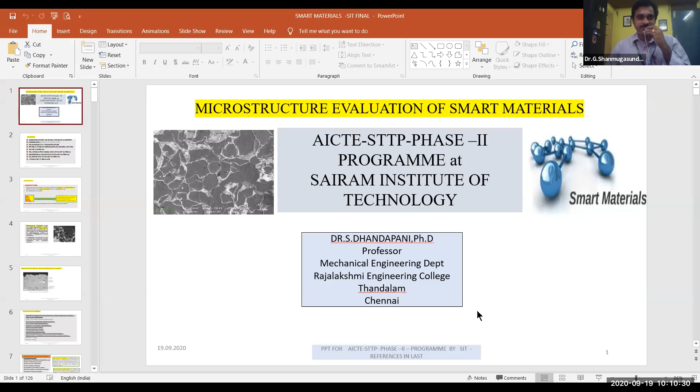Thank you very much to the Sairam College group for inviting me, and to the Department HOD and faculties for the introduction note. Thank you, and good morning to one and all participants present. In this session we are going to see the microstructure evaluation of smart materials.

In this microstructure topic, the content includes phase change, crystal and defects, microstructure, microscope imaging and resolution, measurement of microstructure, general types of microscopes like optical microscope, XRD, SEM, AFM, TEM analysis, and smart materials and transformation mechanism of smart materials, properties and components of smart materials, classification of smart materials, and applications in real life. So these are the contents we are likely to see.

As a basic overall brief of this session, we'll recall the fundamentals already studied in material science, metallurgy, and physics—the basic elements of microstructure like crystal, lattice structure, and unit cell, which are the basic parameters.

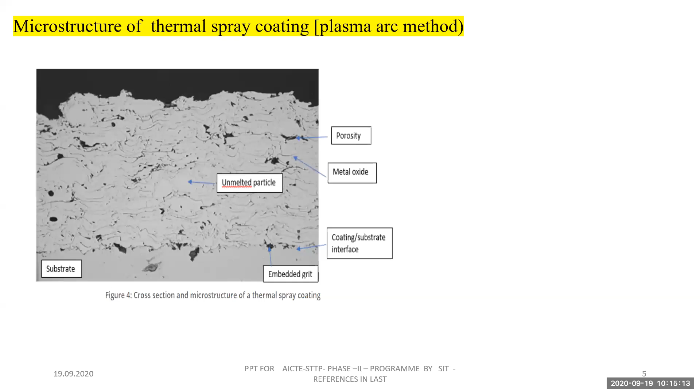That is called microstructure evaluation. A sample microscope diagram is shown, which is a thermal spray coating by plasma arc method. See the cross section and microstructure of the thermal spray coating. After coating, some porosity, metal oxide, and unmelted particles are noted. So like this, only microstructure will be available.

So various methods for measuring microstructure analysis - SEM, EDAX, XRD - you might have heard for research and project purposes. Apart from this, laboratories, consultancy or research laboratories, have these types of methods: Fourier transformation infrared analysis, white light interferometry, rheology and viscosity measurement, high temperature testing, thermomechanical testing, zeta potential measurements, metallography, hardness testing, physical testing - these are examples of analytical techniques.

But we are not going to see all of these, only one or two samples. And what are all the things that are to be measured?

Using these techniques, we can measure grain size of the microstructure, identification of inclusions like tiny parts, porosity and bonding evaluation - how strong the bond is, refractory attack mechanisms and heat impact, surface deposits and coatings, development of interfaces or reactions, unknown particles or materials identification, evaluation of material processing, performance evaluation and variability, failure mechanisms and crack developments. These are the examples.

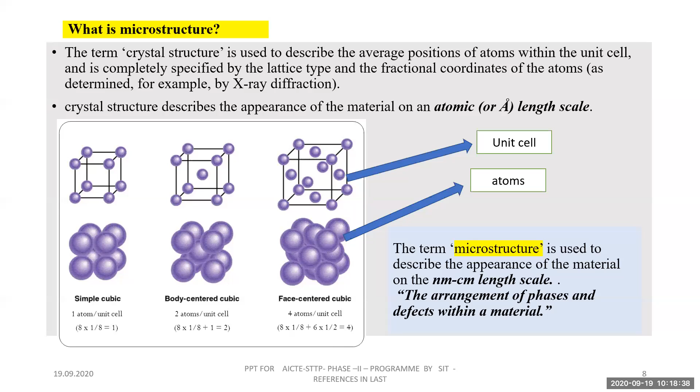Before that, crystallography is related to microstructure. Crystallography is the study of crystals, the formation of solids through X-ray determination, and crystal habits - that is, formation of crystal shape and crystal defects. If we study this, it is called crystallography.

Crystallography with respect to material applied on metals is called metallography. So all are integrated terms.

Crystalline materials are those where atoms or molecules are arranged in a regular or orderly manner in a 3D pattern - we can call that crystalline material. If it is amorphous, that is non-crystalline.

So in crystallography, what are the terms? The crystal - what is crystal? Crystal means a solid whose constituents, atoms or molecules, are arranged in a systematic geometric pattern.

The structure implies the arrangement and disposition of atoms within the crystals. So within the crystal, the arrangement is called structure. And atoms arrange themselves in a distinct pattern in space, which is called space lattice.

This is related to the unit cell, which is the smallest group of atoms possessing the symmetry of the crystal. So a number of unit cells will form the structure, and overall these will form the crystal. The layer of atoms or planes along which atoms are arranged is known as atomic or crystallographic planes. These things we know, we are just recalling.

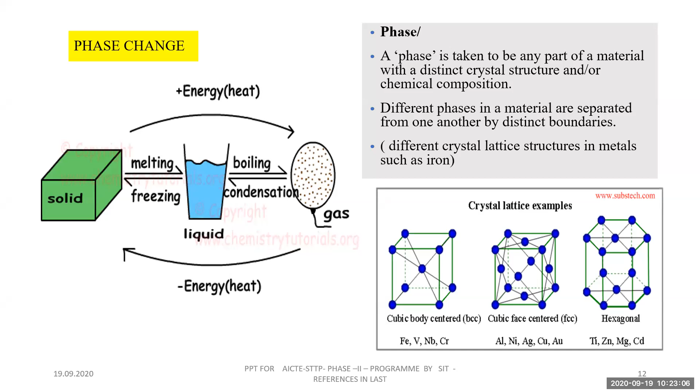And defects, as already told, are also one of the parameters for the formation of a microstructure. A defect means any disturbance to the perfect periodicity of crystal structures. As explained in the previous slide, with the addition of heat or energy change, the phase changes. Due to this, there is a possibility of defects. Lots of defects are there; a few are examples.

Zero-dimensional point defects, linear defects, 2D and 3D defects. Vacancies and interstitials are point defects; linear defects are groups of irregular positions, that is screw and edge dislocations. Planar defects are interfaces between homogeneous regions of the materials, like grain boundaries and external surfaces, and then volume defects, and finally cracks will form. This forms a new structure, and thereby the property will change.

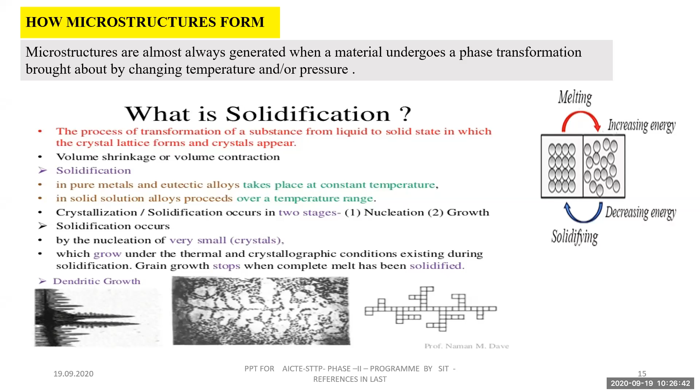See this left side: the melting, increasing energy, how the atoms disappear, and after decreasing energy and solidification, it is automatically reoriented. So this addition and liberation of the energy changes the crystal points, the crystal. So this is actual solidification. See this.

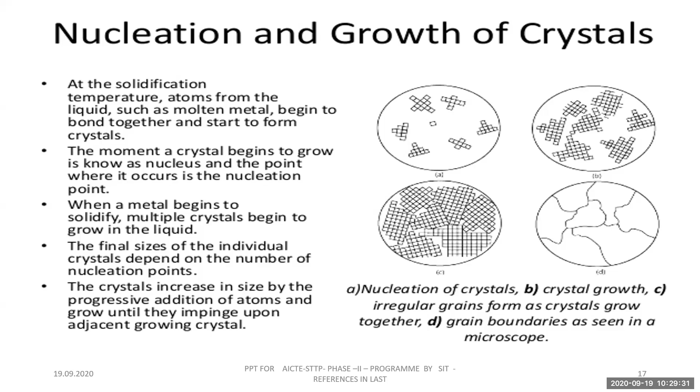So the nucleation of crystals, then crystal growth, then irregular grains as crystals grow, and finally grain boundaries are seen. So this is the mechanism of how the grain boundaries form by liberation of temperature from liquid to solid. So, examples of phase separation. These are the materials.

See, martensite and austenite are the main reason for smart materials. Changing the temperature will change martensite to austenite and austenite to martensite, and this change impacts the smart materials more. Martensite is very hard and brittle. Austenite is a structure which is above 720 degrees, having an FCC structure.

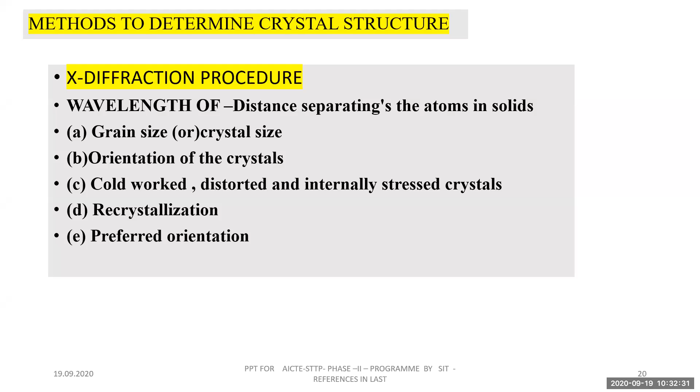X-ray diffraction's basic principle works under Bragg's law, that is, the wavelength and the distance separating the atoms in a solid. With this X-ray diffraction method, we measure the microstructure: grain size, orientation of crystals, distorted or internally stressed crystals, recrystallization and preferred orientation. These we can predict from the X-ray diffraction method.

And then who are the founders? Just for knowledge: Wilhelm Röntgen studied X-rays using Crookes tubes, and then Max von Laue established crystal diffraction. Then Paul Peter Ewald's thesis. These are the people who developed X-rays, and William Lawrence Bragg framed Bragg's law. Based on the Bragg's law principle, XRD functions. And then Peter Debye and Paul Scherrer found the Debye-Scherrer camera technique. These are the founders of these techniques based on X-rays.

How the diffraction works: the basic X-ray diffraction principle is that X-rays are supplied to the lead screen. The X-ray beam is focused through a small slot onto the crystal, and it is diffracted onto the photographic plate. Bragg's law comes in when it touches the crystal, and from the shape and angle we study the crystal nucleation, grain growth and boundaries. Based on the grain boundary, the angle will vary, the reflection takes place, and thereby we can identify the shape.

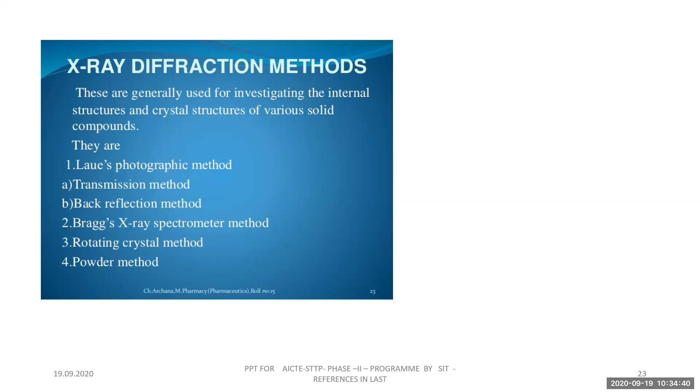X-ray diffraction methods generally used in investigating crystals and various solids: the Laue photographic method, with two types, transmission method and back reflection method; then Bragg's X-ray spectrometer; the rotating crystal method; and also the powder method. There are totally 4 methods. Crystal structure by the Laue method uses an oriented single crystal. There is the Laue method, rotating crystal method and powder method.

In the Laue method, X-rays are supplied from the source to the crystal, and then finally the screen is present. The Laue method has 2 methods: transmission method and back reflection method. Let us see the transmission method. The X-ray beam is coming, then the crystal, the specimen we are going to measure, and there is a screen. That is the transmission method.

Let us compare the other method, the back reflection method. See the diagram. Between the X-ray and the single crystal there is a film. In the back reflection method, the film is placed between the X-ray source and the crystal, and the beams diffracted in the backward direction are recorded. The X-ray goes through a slot in the film and impacts the crystal, and the crystal forms a cone shape. That is called a Laue reflection.

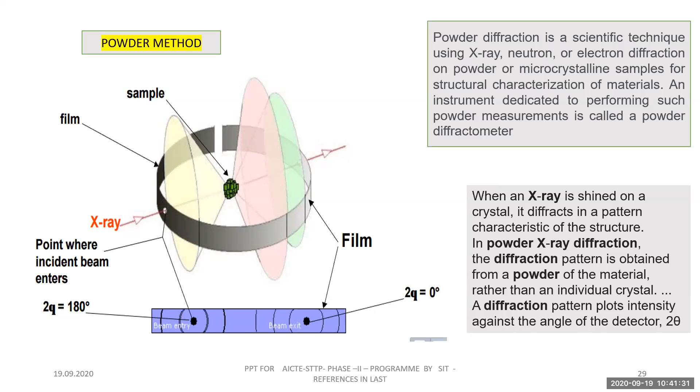So you are seeing the degrees, 180 degree on the left side and 0 degree on the right side. So based on this rectangular fringe pattern, we can come to a conclusion whether it is BCC or FCC, like that.

And then, how to calculate, from Bragg's law: from the spacing of the lines on the photographic film and the known dimension of the camera, the apex angles of radiation are calculated. Using this formula, d is the spacing of the atomic planes, n is an integer, and lambda the wavelength.

It satisfies this formula, the general relationship between the wavelength of X-rays, the angle of incidence and the spacing between the crystal layers. That is, Bragg's law is implemented to predict the pattern of the film formation.

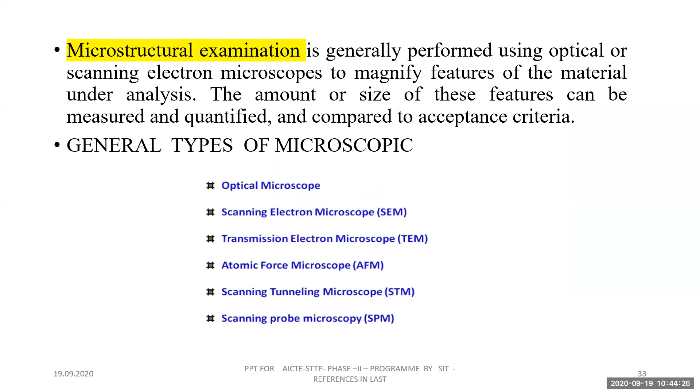Diffraction, that is Bragg's law. Already told that based on Bragg's law, the concept is explained by Huygens' principle and defined as the bending of waves around the edges of an opening or obstacle. When the X-rays are impinging, that is light reflected over the slot, the bending of waves will form by the edges of the opening. Edges of the opening or obstacle means if there is a circular hole in a plate, when you are applying light rays, when it touches the periphery or boundary edges of the hole, it is diffracted and bending will take place. Anything that experiences this phenomenon is a wave.

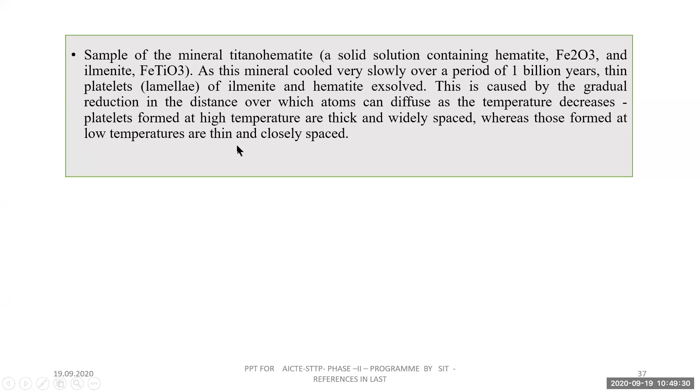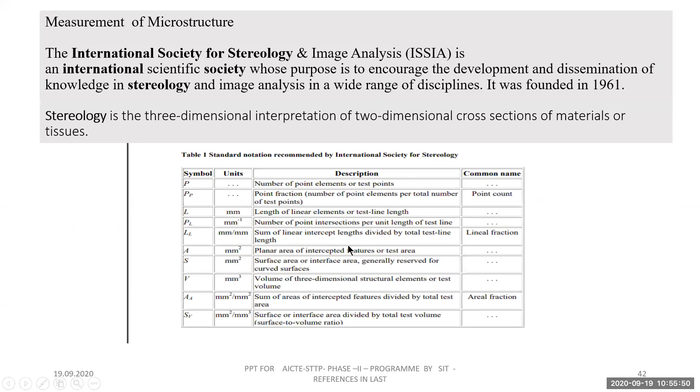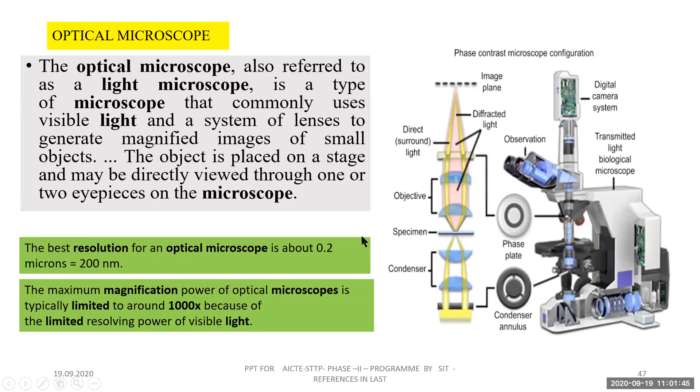Then there is how to prepare a specimen. As you might be studying in metallurgy also, just applying a chemical etching agent for cleaning purposes, then only the surface will be clean. The specimen is dipped in etching agent, which is the immersion method; rubbing cotton soaked in etching; and electrolytic etching. Any method, you have prepared using the polishing machine.

Then the specimen is the object being examined. Most specimens are mounted on slides. Slides mean that since the specimen cannot be held by hand or finger, we have to provide a supporting holder. That holder is made by the mounting machine. The specimen and the holder will be prepared using this molding machine. That is the purpose of molding. After this, we can take the specimen and use it.

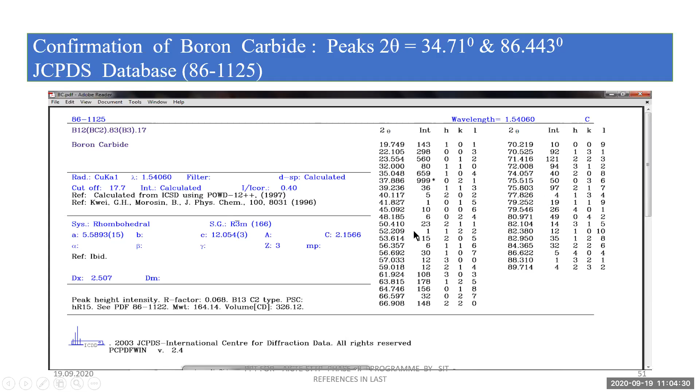For example, it is shown for boron carbide at 34.71 degrees. This result is taken from the XRD. This 34.71 value is available in the JCPDS standard table. If this degree is available in your output, then you are confirming boron carbide is present. If it is not available, then the material is not there, or it is not properly impacted, like that. So this gives confirmation.

This is the scanning electron microscope. We know it can go beyond 1000x magnification, maximum up to 3 lakhs magnification, to provide high quality imaging.

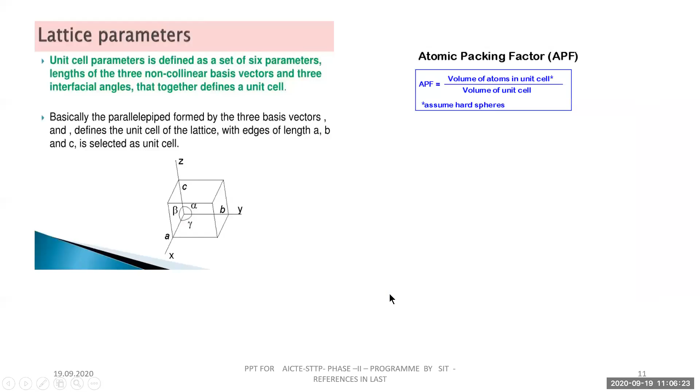Sir, anything is there? Sir, audio is there? Sir? Sir? Hello? Sir? Sir, audible? Sir, Shanmugh sir? Hello, sir, audible? Yes, sir. Audible, sir. Audible, audible. You continue, sir. Audible. Audible. Okay, okay. You continue, sir. So we have seen up to slide number 53. Yes, sir, 53, this one.

Scanning electron microscope: these electrons interact with atoms in the sample, producing various signals that contain information about the surface topography and composition of the samples. Compared to the optical microscope, SEM is more developed, and 2D imaging is possible.

Whereas in AFM, atomic force microscope, there is a cantilever with a very sharp tip as the inside mechanism. This cantilever touches the surface of the boundary, the grain boundary, contacting it with a sharp tip to scan over the sample surface. As the tip approaches the surface, the close-range attractive force between the surface and the tip causes the cantilever to deflect.

Based on this deflection concept, the atomic force microscope works. With atomic force microscopy we can predict both 3D and 2D. But scanning electron microscopy gives 2D, while atomic force gives 3D as well. Transmission electron microscopy also gives 3D and has more in-depth detail; compared to atomic force, TEM has much higher magnification, as already seen with low, medium, and high magnification images. At high magnification we see total details, like the length of hematite, limonite, and so on. Similarly with TEM images we can predict the depth and clean geometrical shape of the microscope data.

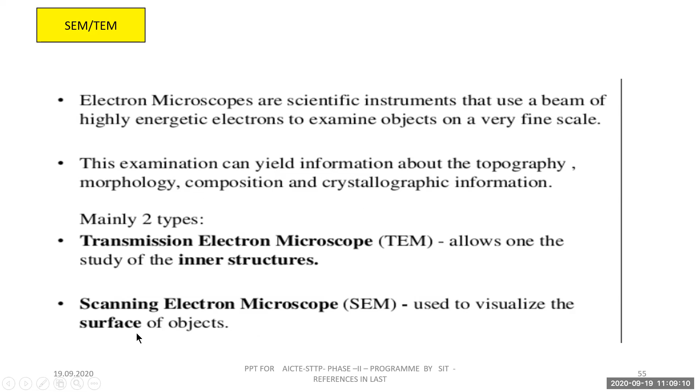TEM allows study of the inner structures, while SEM is used to visualize the outer surface. So one is the outer surface, the other is the inner structure.

SEM working: there is an electron gun producing an electron beam, then a first condenser lens, a second condenser lens, and a deflector coil. The electron gun consists of a cathode and anode. When electrons from the source, primary electrons, impinge on the surface of the specimen, diffracted electrons are produced based on the shape of the grain boundary or crystal structure. Secondary electrons will fall and that will be focused.

The electrons are focused using the objective lens onto the sample, and the diffracted image is focused on the screen; that is reflection. The condenser lens controls the amount of electrons traveling down the column, and the objective lens focuses the beam, and after final deflection, the coil helps to deflect the electron beam, so SEM attracts the secondary electrons.

Finally, the additional sensor detects backscattered electrons and X-rays. See, backscattered means that is the result output, that is in the image screen. We are able to predict the image of the boundary of the grain structure or crystal structure.

See the preparation. The sample is coated with a thin layer of conductive material, using a device called a sputter coater. It is a small chamber with vacuum, and the gold foil is placed in the instrument. Using argon gas, a light gold coating is made,

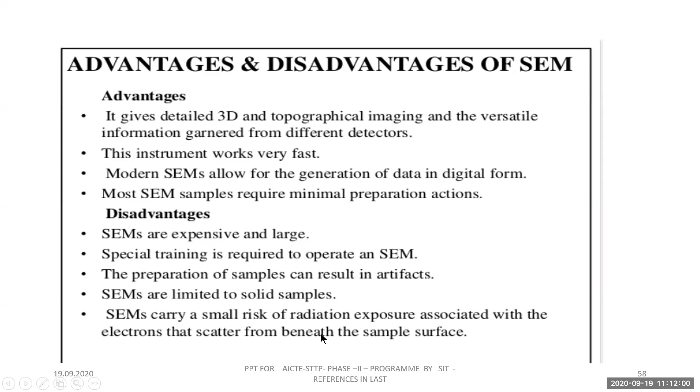Disadvantages: SEMs are expensive and large. Special training is required for SEM. Preparation of samples can result in artifacts, that is, artificial defects. And because we are dealing with gas, argon gas, SEMs are limited to solid samples, and carry a small risk of radiation exposure associated with the electrons.

That is dehydration, washing with increasing ethanol, followed by a final wash with another polar substance like propylene oxide. Then rinsing the pellet; the final specimen is embedded in resin and cured in vacuum, and finally trimming, thin section sample trimming, and it is ready. So these are the methods, roughly overall. Then TEM working.

The working principle is more or less similar to SEM, but the electron source consists of a cathode and anode, with a tungsten filament cathode which emits electrons when heated. Then the negative cap confines the electrons into a loosely focused beam. This beam is accelerated towards the specimen by the positive anode. Same concept of negative and positive, with the magnetic lens and vacuum.

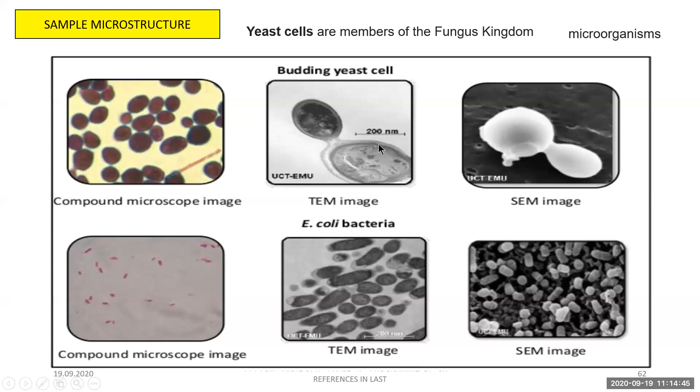Some of the samples: yeast cells and their microstructure. Yeast cell TEM images and SEM images. You can see the difference between SEM image and TEM image. TEM image gives detailed single elements, rough surface in SEM image. This is an optical microscope image. So the three diagrams explain optical microscope, SEM image and TEM image.

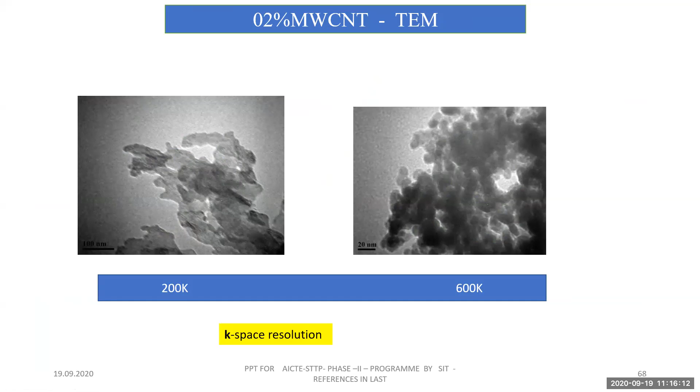Smart material. So far we have seen details regarding the microstructure, and now we will come to smart materials. The first recorded observation of smart material transformation was made with gold cadmium. Then further it changed to brass, and on further development, nickel titanium. Finally, nitinol is the prolonged name of the smart material in the olden days, and nitinol was found initially. That is how smart material transformation was first seen, in 1932 and 1938, and then 1962.

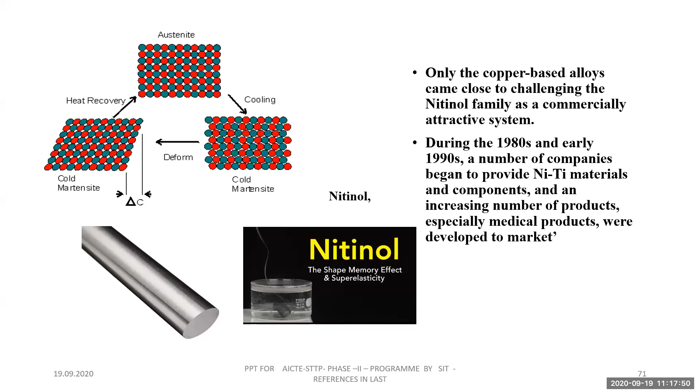Only the copper based alloys came close to challenging the nitinol family; initially the nitinol family is very close to copper based alloys. During 1980 and 1990, a number of companies began to provide nitinol material and components, and an increasing number of products, especially medical products, were developed. Now let us see the basic transformation.

Austenite is the high temperature phase, a cubic crystal, and at low temperature it will be martensite. So austenite is the high temperature phase, martensite low temperature. There are two different forms of martensite, twinned and detwinned. At a certain temperature, smart material will stay in a thermodynamically stable phase, with no change. Due to this transformation mechanism, smart materials have many special properties such as the shape memory effect and superelasticity.

By applying temperature, it changes martensite to austenite by way of twinning and detwinning. There are different phases also. The transformation mechanism is the basic principle of the smart material. Twinned martensite undergoes external stress, whether temperature, pressure, or anything, and is transformed to detwinned. There is no temperature during this transformation; based on the stress, it changes from twinned to detwinned. There is no need of temperature, only stress.

But when the detwinned material undergoes increasing temperature, detwinned martensite will change to austenite. Then austenite will go back to twinned martensite, and this cycle will take place. So adding temperature changes detwinned martensite to austenite, austenite to twinned martensite, and twinned to detwinned needs no temperature, only external stress. Due to temperature, there is a formation of stress and strain that impacts the detwinning and twinning.

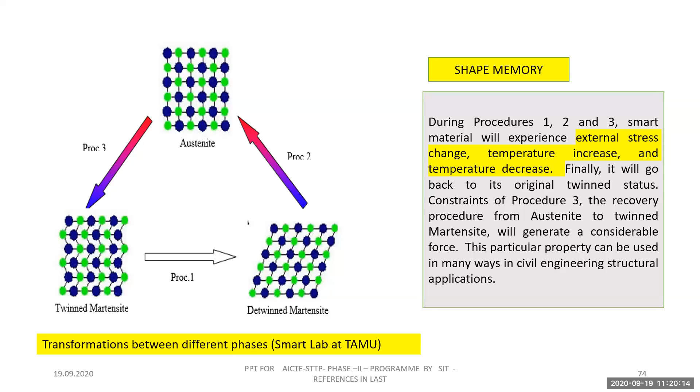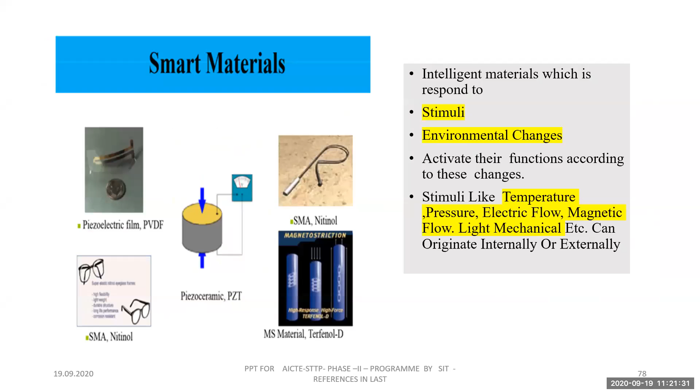For smart material, the stimulating parameters are temperature, pressure, electrical, magnetic, light, and mechanics. These parameters stimulate the smart material from one form to another. Temperature, pressure, electrical current or magnetic fields will change the smart material. What is meant by smart material? Smart materials react to changes in their environment. Smart systems are designed to react to change. For example, they can respond to heat, light, moisture, electric, magnetic fields.

So these are the stimulating elements, and what is the impact? Color change, light emitting, moving material, temperature changing, thickness changing. These are the outputs. Inputs are the parameters: temperature, pressure, moisture, current, strain, stress. Output is color change, light change, movement, temperature. A smart structure may have a sensor, that is stimulation, and an actuator. So there are 3 degrees of smartness. So let us see.

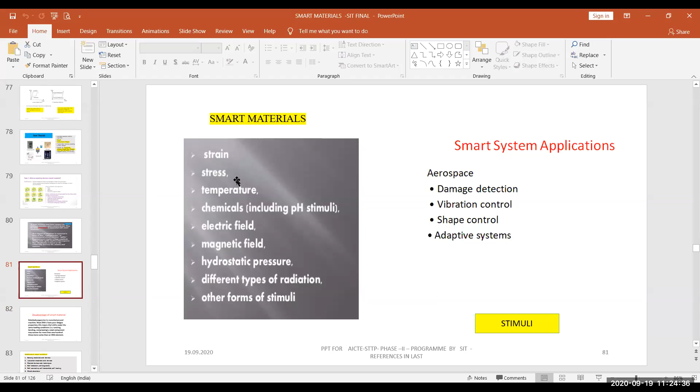See, disadvantages of smart materials. These are the parameters: stress, strain, temperature, electric field, or hydrostatic. These are the stimulating elements, these are the applications, and these are the disadvantages. It's relatively expensive to manufacture and machine. Most smart materials have poor fatigue properties under loading conditions; comparatively these smart materials are lagging, because steel components survive more than 100 times compared to smart materials. So this is some disadvantage.

The properties: sensing material and activation of material, controlling devices, self activation, shock absorber, damage arrest, and self corrective; these are the advantage properties. The types: piezoelectric, electrostrictive, magnetostrictive, thermoelectric, shape memory alloys, photochromic, thermochromics. These are the types of smart material, and the input is deformation or potential difference, like the stimulating elements. The output is the same deformation or potential difference.

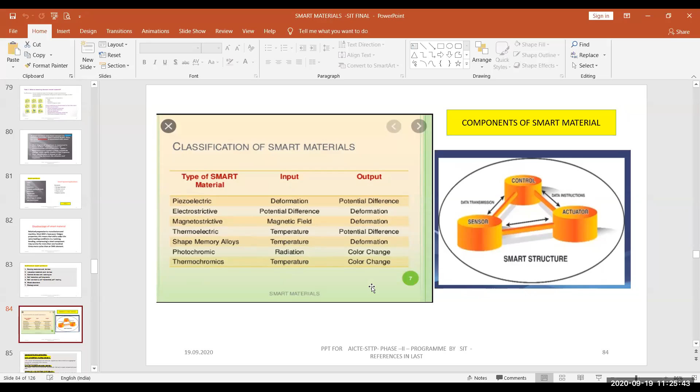In this slide, components of a smart system, that is electronic based: data acquisition, data transmission, command and control. Wiring systems, computer database wiring, or internet cables are also one type of smart category, because the aim of this component is to collect the required data with appropriate sensing and monitoring, for example fiber optic sensing. The purpose of data transmission is to forward the raw data to the local and central command control units. Then the brain, a controlling element acting as a brain. Then data instruction, motor service, action devices. These are the functions of the smart material.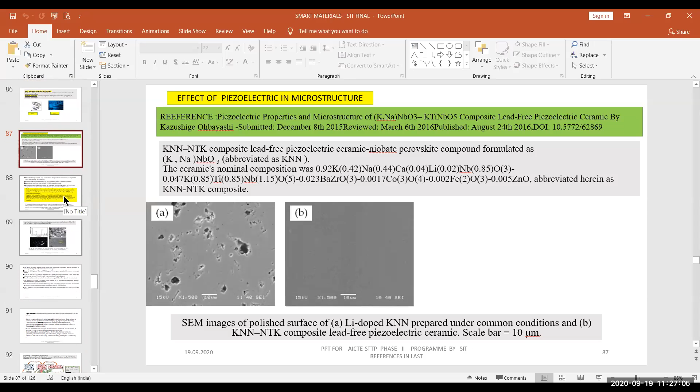Let us see some images from journal papers on the impact of piezoelectric material. Image one shows without piezoelectric, image two the developed piezoelectric material, namely KNN and KNN-NTK, from the reference paper, which explains that applying the piezoelectric concept of smart materials will enhance the properties of the material. This one also explains improving piezoelectric properties by controlling phase structure, and how the stimulation impacts the smart material.

Let us see some videos and examples of smart materials: smart heating, stress induced deformation, that is shape memory polymer, how it changes, then cooling under stress, stress is removed and it recovers upon triggering, and then the next cycle. So it is cyclic. Like this smart material polymer unit; let us watch some videos.

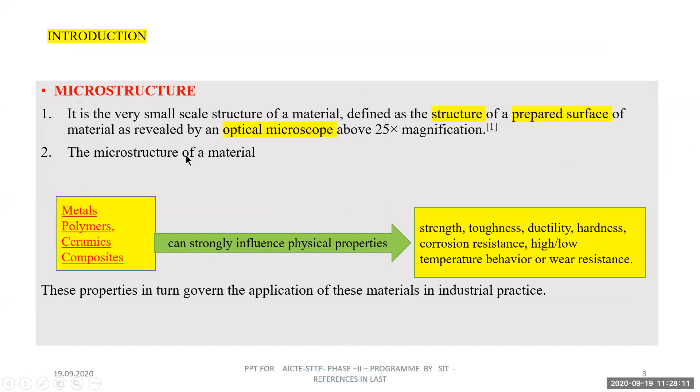Yeah. Last one. Play button.

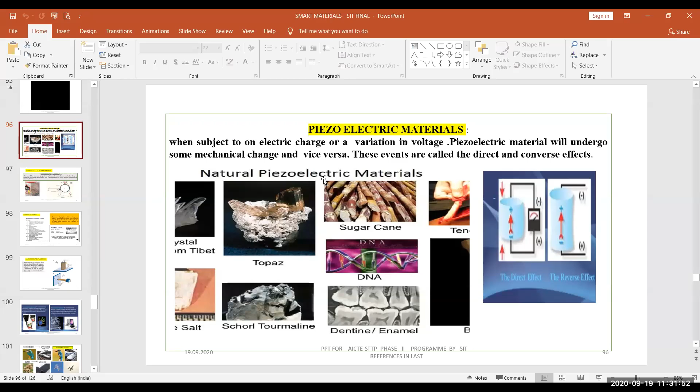Examples are complex fluids, rheological materials. That is also one stimulation. They are in liquid phase and can change state instantly through the application of electric or magnetic charge. These fluids find application in brakes, shock absorbers, dampers, and vehicle seats. There is a fluid, and we apply electric or magnetic current, and thereby it functions. Rheology is the science that concerns the flow of liquids and deformation of solids: rheo means to flow, logy means study of.

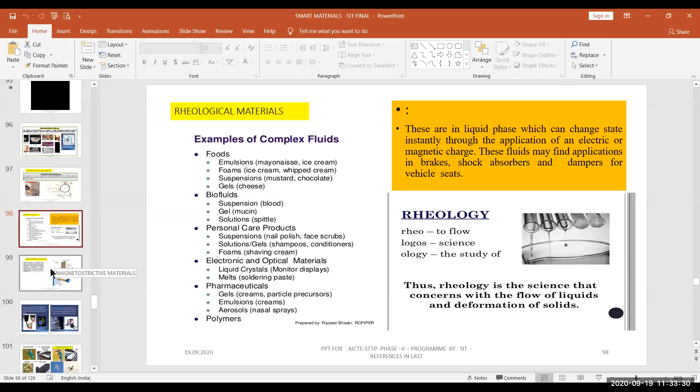So the flow of science study based on that: biofluids, personal care products, electronic optical materials, pharmaceuticals, everything are given as examples. This is one stimulation of the smart material. And magnetostrictive material: when subjected to a magnetic field, and vice versa, the material will undergo induced mechanical strain, and it can be used as a sensor or actuator. So sensors and actuators for hydraulic, pneumatic, electrical or magnetic components, and these are applied.

Smart materials stimulation like thermo-responsive materials. Thermo-responsive is the ability of a material to change properties in response to changes in temperature. They are useful in thermostats and in parts of automotive and air vehicles. You can see this tumbler: when hot coffee is poured, the image on the outside will change.

So these are also one of the smart materials. The Kingfisher and the Japanese bullet train: the aerodynamics concept was found by comparing them, that is called biomimetic materials. And this is how the Velcro concept came from the burr, natural to artificial comparison. Natural smart material is compared with artificial smart materials.

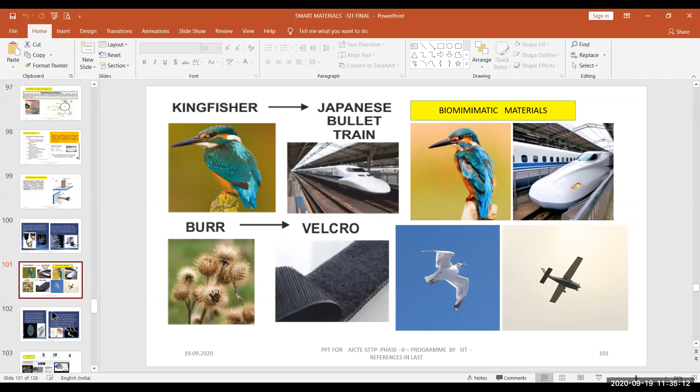And fullerenes: these are spherically caged molecules with carbon atoms at the corners of a polyhedral structure consisting of pentagons and hexagons. These are usually used in polymeric smart systems. They are used in electronics and microelectronic devices, superconductors, and nanotubes. The shape seems to be like that.

The biomimetic materials we have seen now. Another example is shown. And then these are the fullerenes. There are a lot of videos on fullerenes too, but the videos with sound we will see last, if sound is coming.

This one is smart gels, tablets. These are gels that can shrink or swell by several orders of magnitude. Some of these can also be programmed to absorb or release fluids, and respond to chemical or physical stimuli. These gels are used in areas such as food, drug delivery, organ replacement, and chemical processing.

These are shape memory alloys. We already studied in the basics how it was, from 1932 onwards, the growth. Nickel-titanium. The video you will see last if voice is coming. And then applications: aircraft, dental, robotics, reducing vibration, helicopters. These are the applications.

Merits and demerits: biocompatibility, simplicity, compactness, safety. These are merits. Demerits: more expensive, low energy efficiency, complex, limited bandwidth. And these are the real life applications.

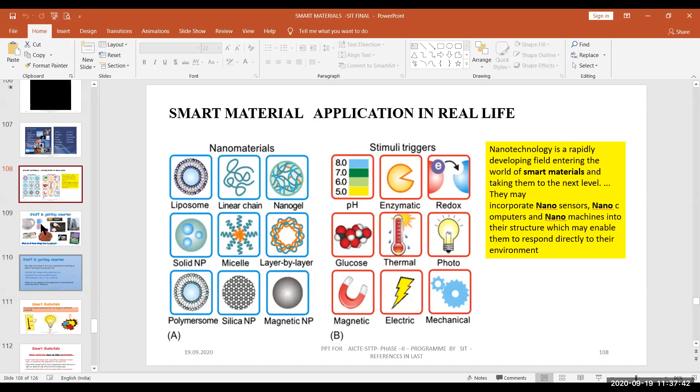And this one, stuff getting smarter. What do all these things have in common? We might not realize, but smart materials are starting to make a real impact. Kettles that change color when they boil. This is the kettle: when boiling, the color is changing. And garments that plug into the MP3 player. So now garments, the coat, raincoat, are added with the MP3 player.

Batteries that report their condition. So batteries report their condition: what is the level of the battery, how much percentage of charge, it will show. That is the smart material. These are the examples of applications exhibiting smart behavior. And let us see this.

You can get special materials that can change in different conditions. Smart materials react to their environment. Smart materials change their properties with heat or light, and they often change back to the original when heated. You have seen in the video, when the smart material is subjected to heat, it will go back to its original shape. Again, when you take it out, you can reshape it.

Then polymorph is useful for molding plastics. These examples, completing complex shapes, jewelry, these are the examples. Thermal materials, the viscoelastic polymer examples, and this one, thermochromic materials. Pigments change back to their original color when they cool.

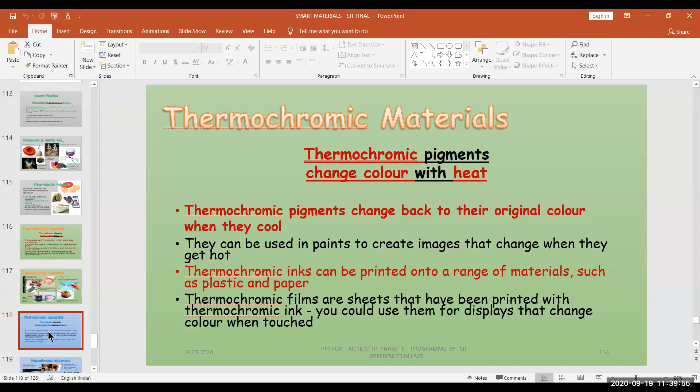Display changes. Then photochromic pigments change color in response to light. By applying light, the colors change in the photochromic. They are explaining this. Photochromic inks can be used to print T-shirts with designs that only show in sunlight. They can be put into spectacle lenses to make glasses also. There is a color change in the sunglasses when it's sunny.

And see this photochromic material. Lenses become darker when ultraviolet light increases. Glass changes from transparent to opaque as the level of light increases. See, in the building also they have kept a smart material glass. When the sunlight comes, there is a transparency, and during night there is no transparency.

Similarly, the mini rainbow paint option gives the rainbow effect in bright sunlight. The car bonnet will seem to have a rainbow effect, but when there is no sunlight, the color will change. The color changing wristband indicates when sun cream needs to be reapplied, when it's time to move into the shade, like that t-shirt, because of light.

And fluorescent pigments, fluorescent lights we have seen. Fluorescent pigments store light and slowly release it and glow. The fluorescent, you can see these safety guards for traffic persons or fire persons wearing the coat.

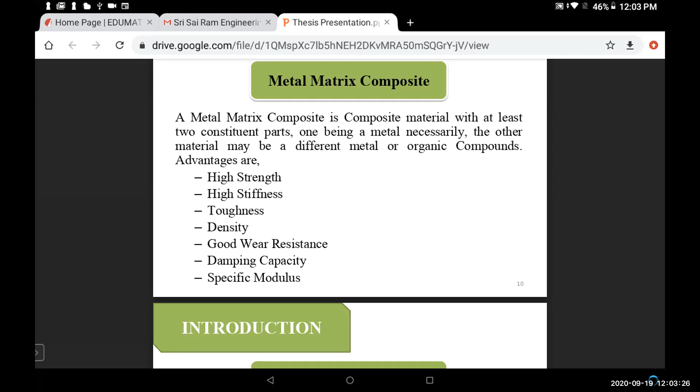Since time is running, I want to cover the research part of this presentation and give an overall view of the research content. In this presentation, I am going to present aluminum metal matrix nano composite.

Aluminum metal matrix composites are normally classified into particle reinforced, whisker or short fiber reinforced, and continuous fiber reinforced composite. Fabricating continuous fiber reinforced aluminum metal matrix composite is somewhat difficult compared to the other types. The last one is the hybrid aluminum metal matrix composite.

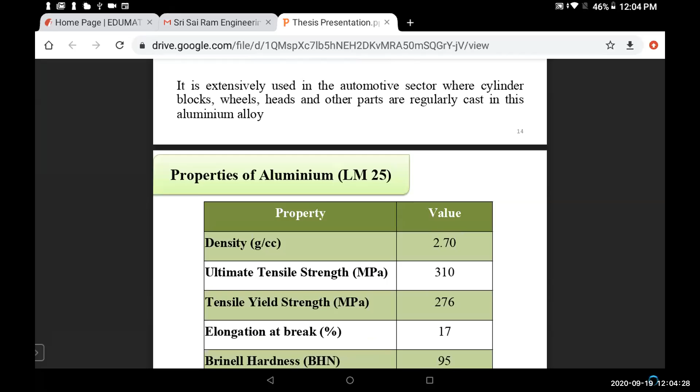This hybrid aluminum metal matrix composite is nothing but composite material which contains more than 2 reinforcements. In this work, we used LM25 aluminum alloy, which acts as the matrix material, and we used 2 reinforcements, namely silicon carbide.

And then we use carbon nanotubes. Since you use carbon nanotubes, this work is normally termed as the nano composite material. I think everybody is aware of CNT. CNT describes a family of nanomaterials made up of carbon.

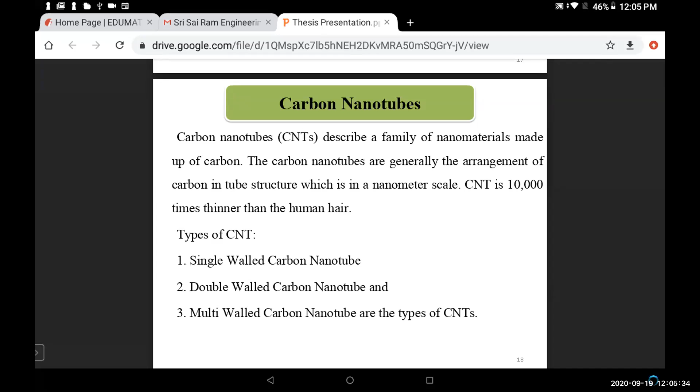CNT is generally an arrangement of carbon in a tube structure at the nanoscale. CNT is 10,000 times thinner than our human hair, which is measured in microns. There are various types of CNT material: single wall, double wall, and multi-wall carbon nanotubes. So these are some introduction about carbon nanotubes and multi-wall carbon nanotubes.

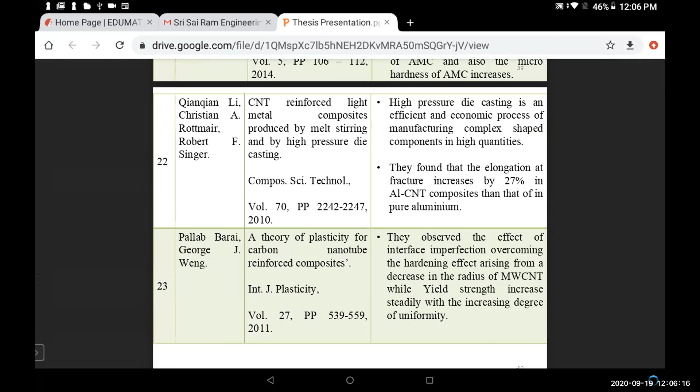There are various processes of manufacturing this metal matrix composite, nano composite. One is stir casting process. The next one is the liquid state, and the next one is the solid state.

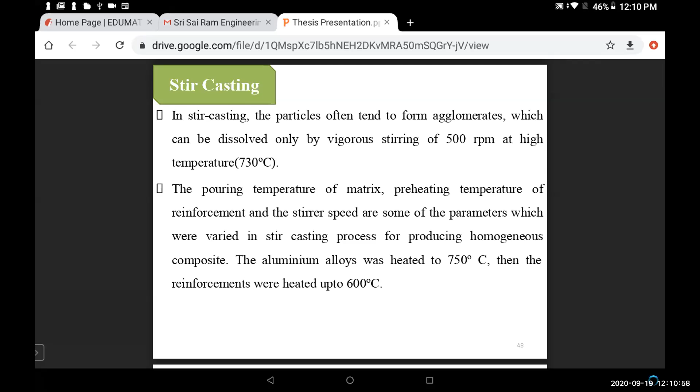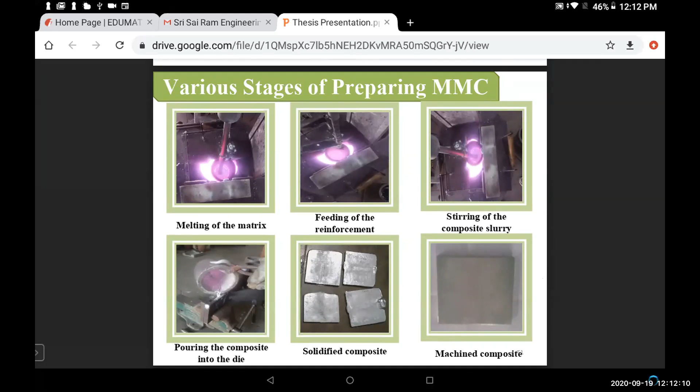These are the various stages of preparing metal matrix composite. First one is the melting of matrix. This melting of matrix is performed in a stir casting setup. Then feeding of the reinforcement. We have to add the reinforcement at the exact time. If you do not properly maintain the time, sometimes the reinforcement will vanish, or sometimes it will not properly mix with the molten aluminum. So whenever you take the SEM or perform the XRD, you can't get very clear images. Then the stirring of the composite, and the pouring of the composite in a die.

So you have to prepare the metal die either by manual machine cutting or by using the CNC. You have to prepare the die, and you have to allow it for solidification. Minimum 14 to 18 hours you should allow it for solidification. Later you can take the composite sample and you have to machine it. So what are the various samples manufactured? We maintain it as category 1, 2, 3. Each category has samples 1 to 3.

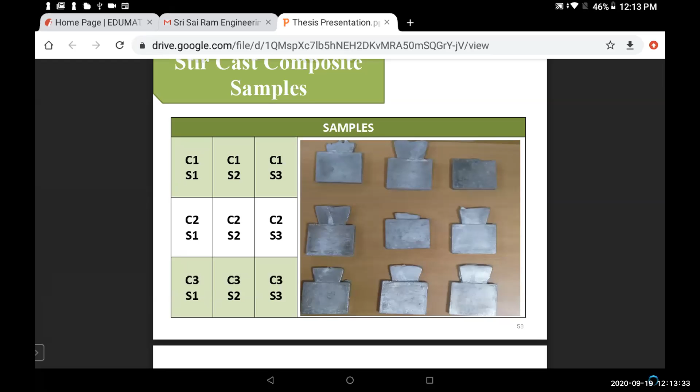So these are the various samples manufactured: C1S1, C2S2, and C3S3, with pure CNT, pure silicon carbide, and the silicon carbide and CNT combination. After fabricating this composite sample, we have to machine it for further processing. The ultimate aim is to evaluate the various mechanical characteristics of the material. So we perform 4 mechanical tests. First, the density test, to see how well the composite sample is manufactured. Second, we perform the tensile test. Everything is performed as per ASTM norms.

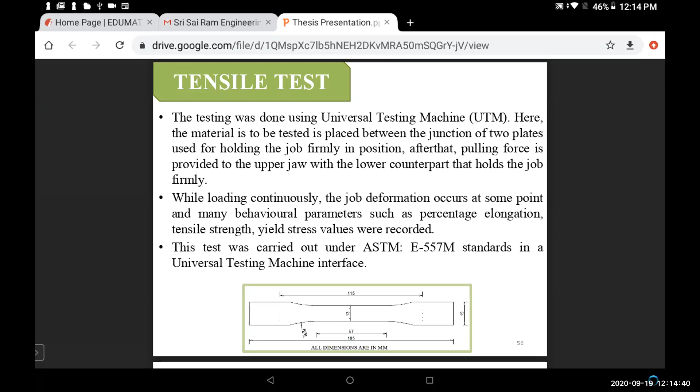Whenever I give this presentation, people normally ask how we are going to fabricate the sample. A lot of manufacturing setups are available. By using abrasive jet machining, we can easily cut this sample as per the norms, because abrasive jet machining and abrasive water jet machining are CNC based. Once you give the diagram in the form of an AutoCAD file, it will automatically convert it into the machining part and cut. Otherwise, you can use manual cutting also, maintaining the ASTM standard and dimensions.

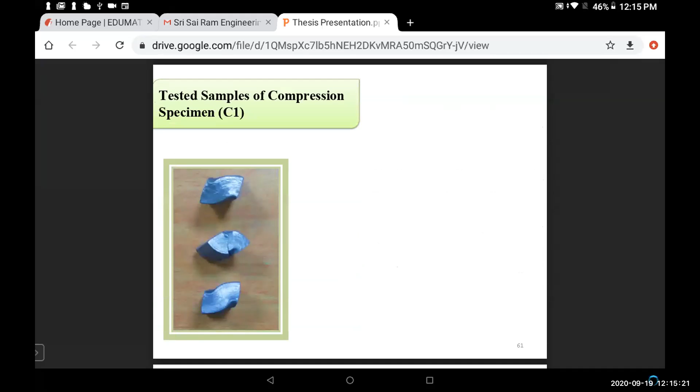So these are the compression samples of C1, C2, and C3. I already told what you mean by C1: CNT; C2: pure silicon carbide; C3: combination of CNT and silicon carbide. We have to perform the compression test using the ASTM E9-09 standard. And the tested specimen samples are shown here: C1, C2, and...

Participant 131, kindly mute yourself, please. Thank you.

So these are the compression. I think I handled tension test, compression. Then we performed the impact test as per ASTM D256. So these are the various samples of the impact test: C1, C2, and C3.

And we performed the hardness test by using the... so the hardness, we can have only a small indentation. So hardness is nothing but the resistance to indentation. So by performing the hardness test, we get the hardness of the material. There are 3 samples. And last we performed the wear test.

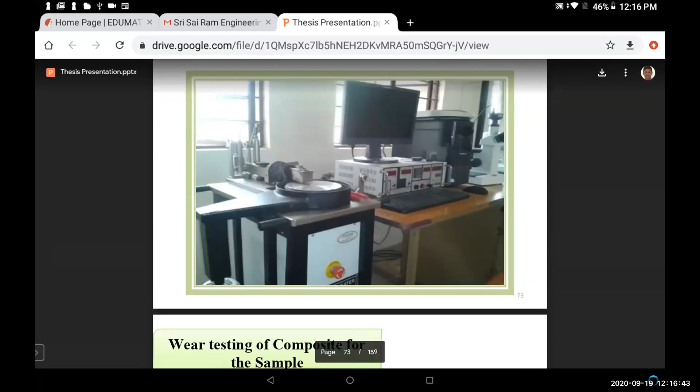So what are the wear characteristics of the fabricated composite material? So we used the pin on disc apparatus available in the Kanchi Sankara University. So this is the wear testing of composite for the pin on disc apparatus. So the disc material is made up of steel.

But now I want to discuss the result. The result is a very important part, because this presentation is mainly based on the research part of a scholar, so I want to give the output. So as I told earlier, there are 3 categories of composites fabricated: C1, C2, and C3. C1 contains aluminum with multi-wall CNT alone. C2 contains aluminum with silicon carbide. C3 contains aluminum with both reinforcements, silicon carbide and multi-wall CNT.

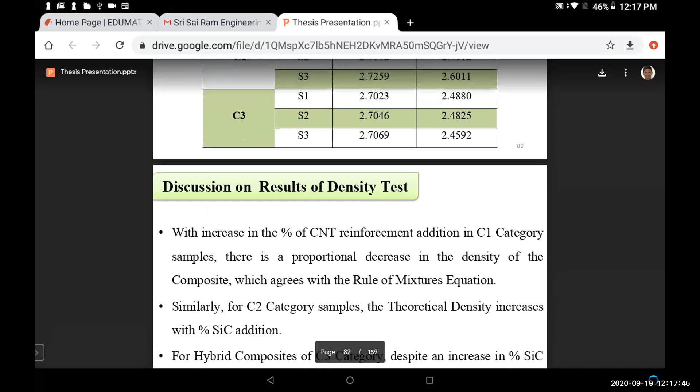So in the density test, you will see the density of C2 is higher than C1 and C3. So it is the category of sample. The theoretical density increases with the percentage of silicon carbide. Since C2 contains pure silicon carbide alone along with the aluminum, the density of the silicon carbide composite is higher than the other two.

Result of density test. So normally, if you see the hybrid composite, it normally gives very high tensile or some of the mechanical properties, because it normally has the combined properties of both reinforcements. In this case, it has the property of silicon carbide as well as the multi-wall carbon nanotubes, which is available in C3.

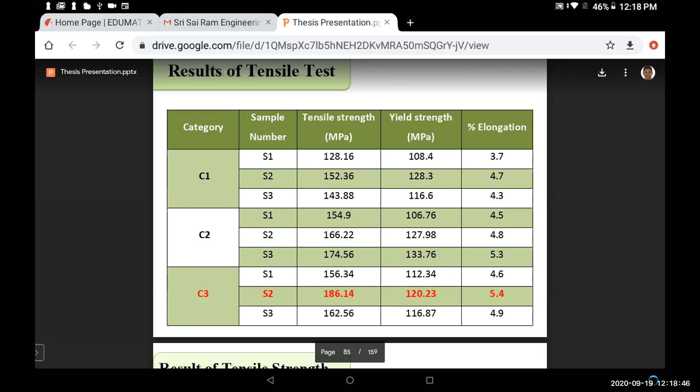And the next one is the compression test. So the result of the compression test shows that again C3S2 has a very high compressive strength, taking a compressive load of 97 kilonewton. So this is also mainly due to the presence of multi-wall CNT. If you see, C1 and C3 performance are very close, because improved compression property mainly depends on the presence of multi-wall CNT.

So since C1 and C2 contain the pure CNT alone as well as the silicon carbide alone, C3 gives the combined effect of both materials. That's why normally the research is mainly focusing on hybrid composite materials. So the first two are mono composite materials. The third one is a hybrid composite material. You can add one more reinforcement also.

For example, I want to fabricate a brake pad or some materials for wear property, or materials used for corrosion resistance applications. I can introduce aluminum oxide also. So it will become three reinforcements: aluminum oxide, silicon carbide, along with the multi-wall CNT. Then the property may be completely different. There is a drastic change in the property of the materials.

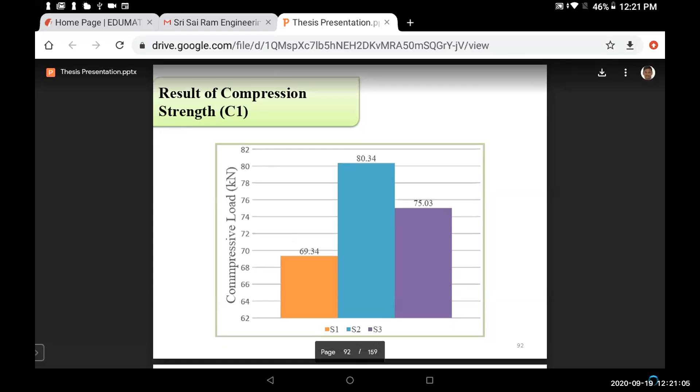But C3S3 has a very good hardness as compared to the other 8 samples manufactured, that is 3 in C1, 3 in C2 and 3 in C3. So if you see, out of the 4 tests we performed earlier, C3 gives a very good performance. So again I come to say that the hybrid composite has its own impact on giving better mechanical properties and behavior of the materials.

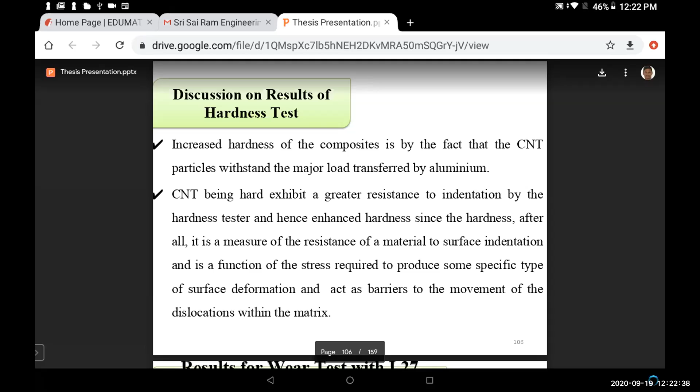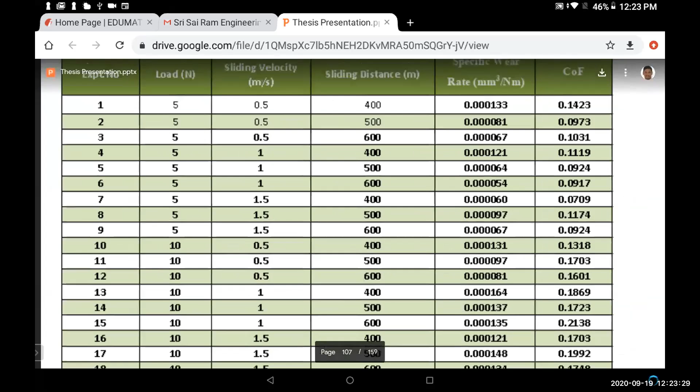Okay. So in order to analyze the wear of the material, from the above four examples, we selected the material with very good mechanical property. That was set for performing the wear analysis. So we performed L27, nothing but the orthogonal array L27; 27 experiments were conducted by the variation of the load, sliding velocity, and sliding distance. These three are inputs. If you see this table, I think it is visible. So the load, sliding velocity, and sliding distance are the input parameters, at three levels. So we got around 27 experiments.

We calculated the specific wear rate as well as the coefficient of friction, and the ANOVA calculation. ANOVA calculation also shows the percentage of contribution. So when we see the above table, for the wear parameters and the coefficient of friction, the one which plays a vital role is the load. The load which is applied on the material has its own effect because the percentage contribution of load is 62%. Then the sliding speed has 6% and the sliding distance has 4% of the contribution.

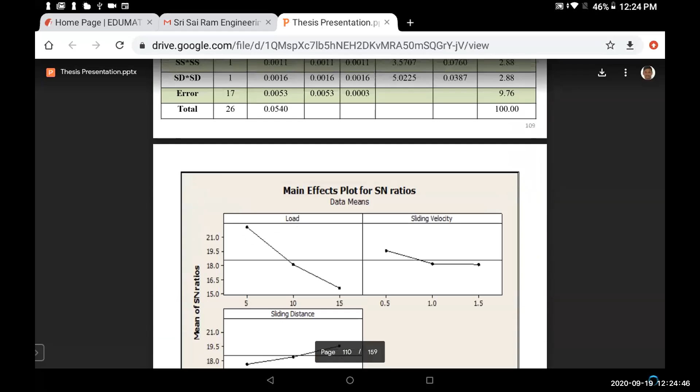Now this is the SN ratio, that is the signal to noise graph, which shows the effect. So based on this diagram, we have the SN plot. This SN plot and ANOVA table are plotted, first for the specific wear rate, second for the coefficient of friction. We calculated only two, specific wear rate and the coefficient of friction. Hence the ANOVA was performed for the two things. If you are going to evaluate two more properties, you can extend this existing table.

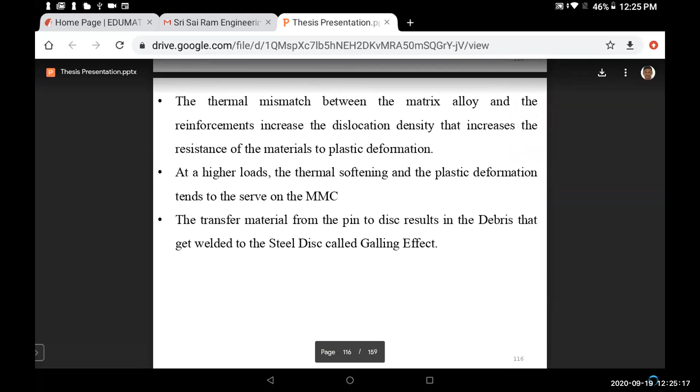So the three inputs are the load, sliding distance, and sliding speed. The outputs are only the coefficient of friction as well as the specific wear rate. Further, the ANOVA has been performed, compared, and we calculated the percentage contribution of each factor. So here is the role of CNT in reduction of wear behavior in aluminum silicon carbide composite. This is the final essence of the research.

The weak bonding between the CNT and metal leads to easy slide or roll between the contact surfaces. So why this aluminum CNT silicon carbide composite with CNT gives a very low wear rate: this point is very important. The weak bonding between the CNT and metal leads to easy slide or roll between the contact surfaces and minimizes the direct contact between the surfaces, thus resulting in a decrease in the friction coefficient of the composite materials and the specific wear rate.

So my previous speaker, Dr. Dhandapani, gave a very clear picture about the scanning electron microscope, its performance and its working. So here I want to give some of the salient features of the purpose for performing the SEM analysis. It is not SEM analysis, it is a morphological analysis using the SEM, scanning electron microscope.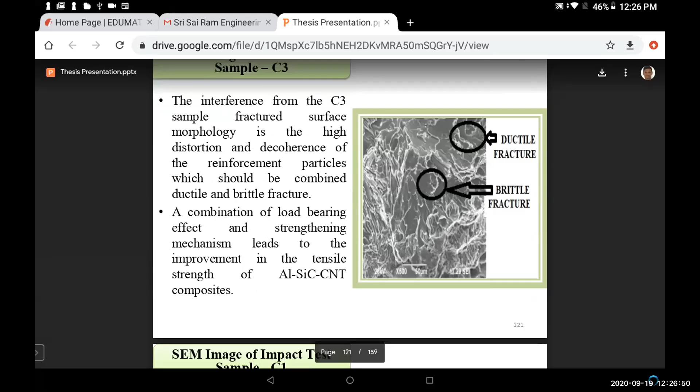So here if you see, some blowholes are identified in the composite and some voids are available. This is similar to the casting defects encountered in the conventional casting process. And some fracture is also identified in the casting, a brittle fracture. So due to the improper cooling, the voids accumulate.

Sometimes accumulation of reinforcement may be observed; it is due to improper stirring of the material, along with crack propagation, voids and cracked surfaces. So what are the drawbacks of having this type of failure or surface property? It will reduce the mechanical properties or the behavior of the material.

So what are the steps we have to take? Whenever we perform the stir casting process, we have to predefine some things. The proper temperature must be maintained, proper stirring speed must be maintained, and proper power supply should be there. For example, when I'm adding the reinforcement, if there is any power fluctuation, the stirring speed will be reduced. I want to maintain 800 RPM, but it may be reduced to 650 RPM.

What will happen? Complete stirring cannot be obtained, which will lead to accumulation. That is, the reinforcement will accumulate here and there, which is clearly shown in the XRD as well as in the SEM analysis. So these are the scanning analyses. XRD was also performed. EDAX was also performed to know the content of each and every reinforcement and their sources.

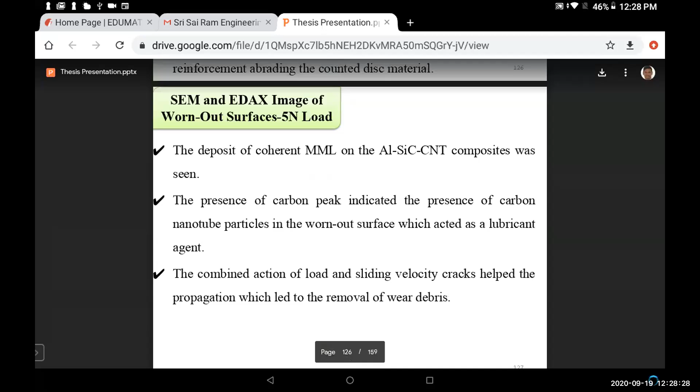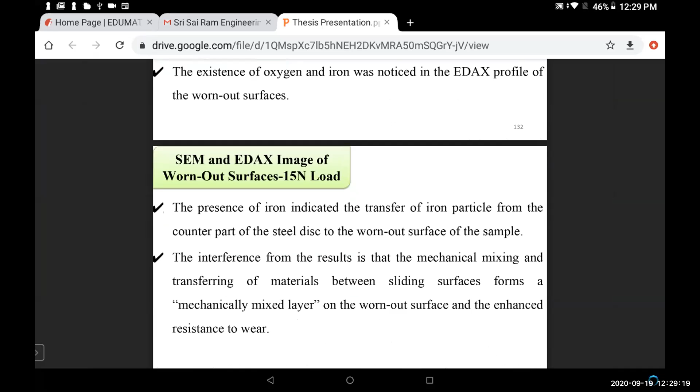Due to some network issue, I think you people are not properly seeing my side. I think now it is okay. That's all. Sir, yeah, thank you, sir. In my area also the same issue, so that's why my video is off. That is the problem. Yes, sir. Okay, sir, thank you. I'm finishing. Thank you, sir. Thank you very much, sir. Thank you, Dr. Vijaya Ramnath, sir.